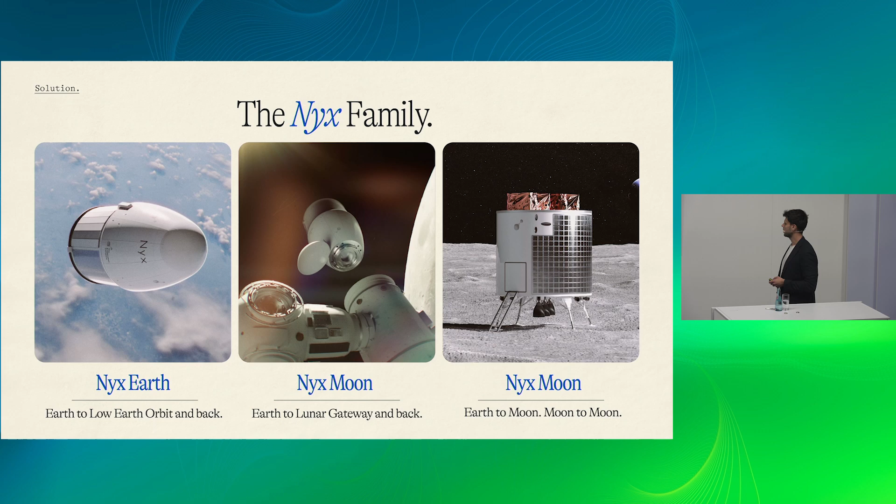Then we're developing a capsule that should go to the moon. In the center picture, either to go to the Lunar Gateway, which is a lunar station that should be around the moon's orbit, done by the European Space Agency, ESA, and on the right side, also a moon lander. Biggest difference between these 2 capsules are these little things here: 3 rocket engines, liquid methane and liquid oxygen. Some parts of this are 3D printed, for example, the combustion chamber, which you will see later.

In space, we mostly want to do integrated cooling systems, so that's actually regenerative cooling. That means that the fuel, which in our case is liquid methane, is not only used to propel the vehicle, but also for cooling. That basically means that you pump your fuel through intricate cooling channels until it reaches the point of combustion, is mixed with your oxidizer, and then ignited to get the combustion going.

That increases performance a lot, and in additive manufacturing we can customize material properties. So for these engines, that mostly means adapting the surface roughness. If you have higher surface roughness, you have higher pressure drop in the cooling channels, which could be bad, but on the other side you also have enhanced thermal performance due to that increased surface roughness.

What's basically happening is these higher surface roughnesses create microturbulence. This microturbulence lowers the pressure, so you have a pressure drop. But on the other side, these turbulences also increase heat transfer. So it's a bit of a trade-off which surface roughness you actually want, not necessarily the best surface roughness is also best for the application.

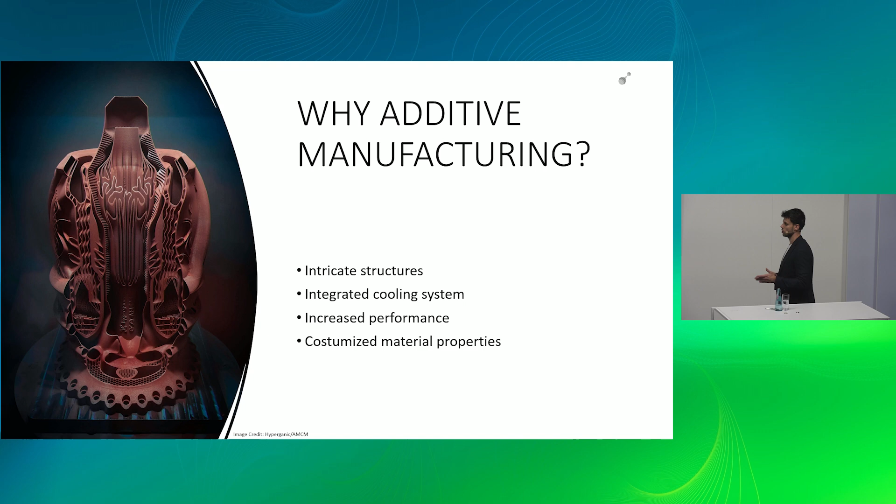When you design a rocket engine, usually you have to do a big trade-off between different materials. Classically, it's either copper-based alloys or nickel-based alloys. Copper-based alloys like copper-chrome-zirconium, or GRCop from NASA, are usually used if you have a very high requirement for thermal conductivity, which is the case for rocket engines. The nickel-based alloys are usually used when you have requirements for very high mechanical strength and chemical resistance. For rocket engines, both is the case.

So usually if you develop these engines, for example the combustion chamber, which is the heart, you have to decide between these two. And that is actually a big trade-off in a thermomechanical way. So you do very big thermomechanical analysis between the materials, and then in the end you would find out which one is best for your engine.

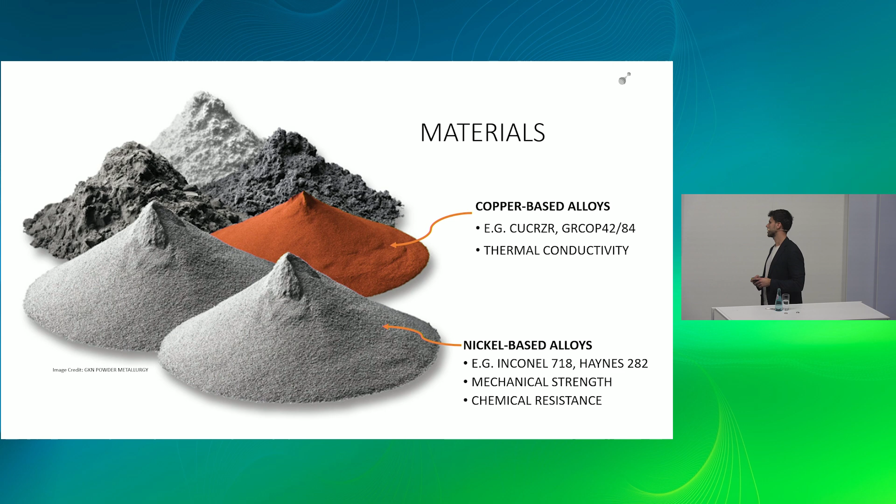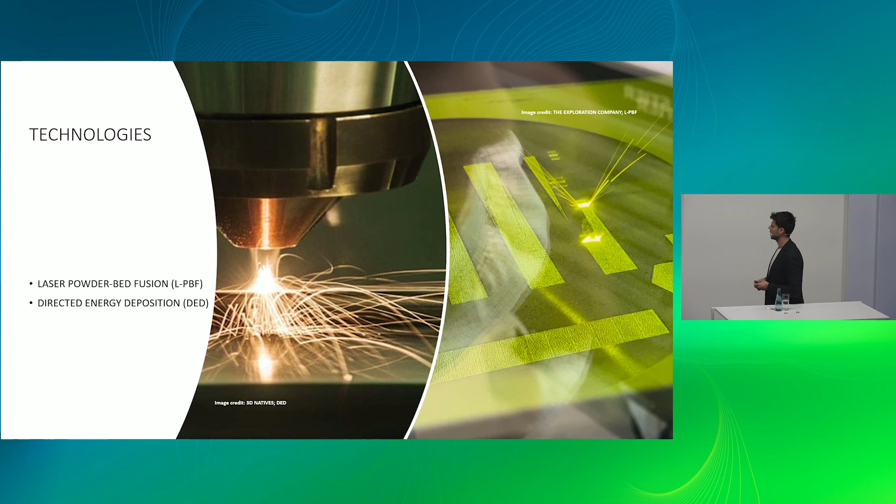The technology we're using at the moment is laser powder bed fusion. This is a picture from the very first build job we did earlier this year in March. Next year we're also looking into directed energy deposition, DED, for a nozzle extension and for tanks. It's a big project for next year.

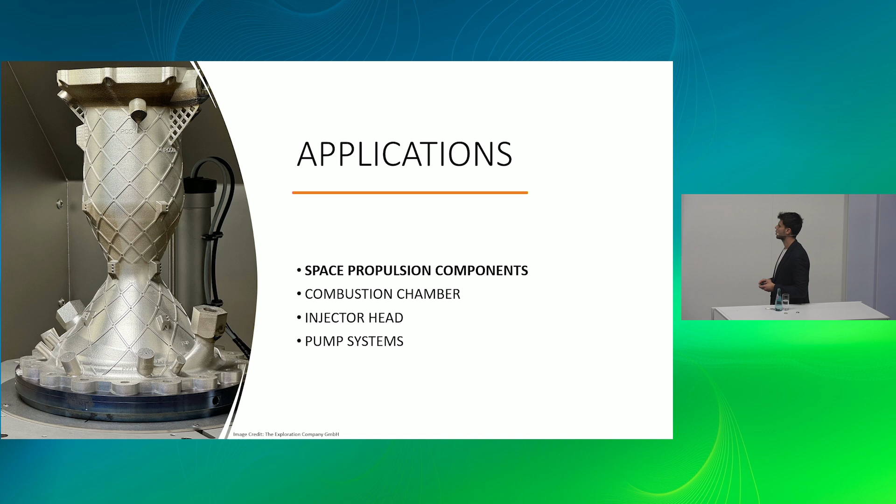To get into the applications, we're mostly or exclusively doing space propulsion components. On the left you can see our combustion chamber for the Moonlander engine. That's the third version we've done so far, and the first one we actually printed in-house, only the second part we've ever done in-house. It's about 400 millimeters high.

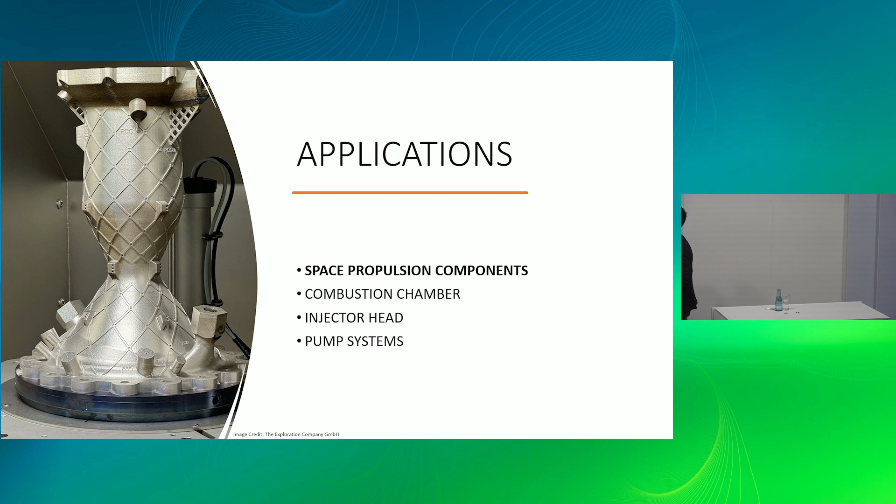Here you can see this regenerative cooling cycle. The fuel goes in, into the manifold, collects and is pumped through very small cooling channels through the part, then injected from the top side and ignited. The wall thickness of this part is only 4 millimeters, and we have to fit roughly 100 cooling channels inside, which is quite a challenge. We're really at the edge of the technology here.

The injector head is another application, placed on top of the combustion chamber in this view. That's where the fuel, liquid methane, and the liquid oxygen oxidizer come together, are injected inside the combustion chamber, and ignited, which then propels the system.

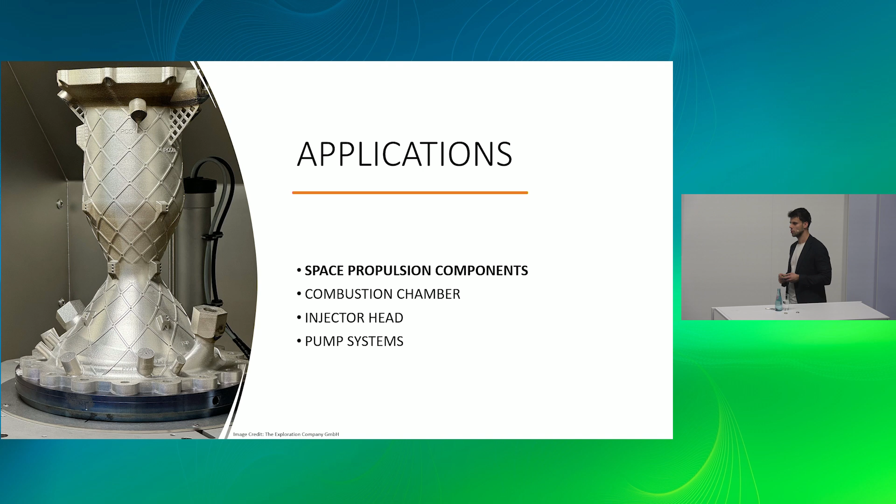We're also looking into pump systems to actually get the fuel and the oxidizer moving. In these pump systems we will develop impellers, inducers, pump housings, and motor casing housings, which is also a topic for next year. We have not started that yet.

Additionally, we have to print this part faceplate up, meaning you have a complete horizontal surface to support. Additional complexity: this support cannot be accessed, since the cavity is completely closed, so we have to have an internal support that cannot be removed. That's the first thing we did—we had a lot of cones supporting that surface.

In a hot firing test, it turned out there's a heat buildup due to that support. It was a massive structure, and heat was concentrating in these cones. The faceplate was getting too hot, with the consequence that it would actually melt if we increased the temperature even more.

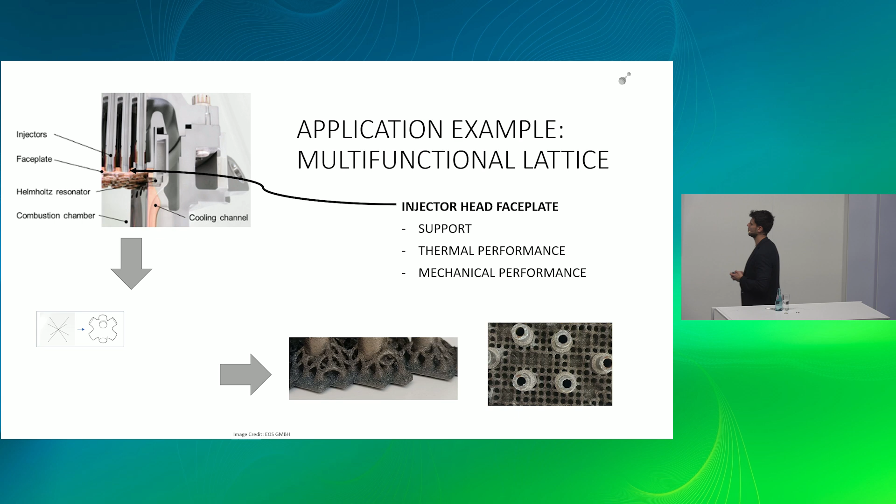For validation, it was actually quick—we just printed some samples for traction and compression. We took the actual lattice geometry, the original beam thickness and distribution, and put it through tensile testing: first traction, then compression, pushing and pulling, and took some values there.

For thermal validation, we took a representative sample of these lattice structures and checked for turbulence and velocities compared to a reference velocity. What we detected, as can be seen in this picture, is that we have a heat buildup in the center of the cones.

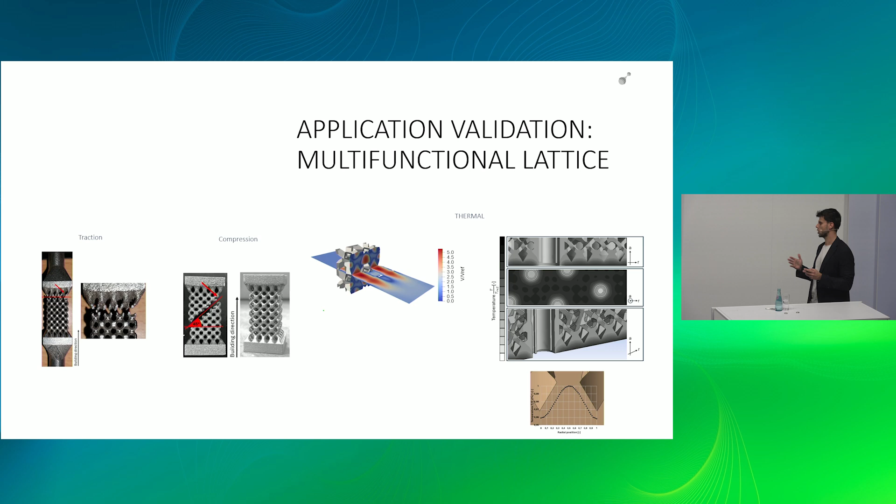So we still need a little bit of cone here for support in a much reduced way. But what can really be seen is that the temperature is concentrating in the center of the cone, which makes sense. You have a massive structure, so in a steady state you have the most heat concentration in the middle, and due to the bad thermal conductivity of nickel-based alloys, there's kind of an inertia for the heat to actually escape, and that is what we try to minimize with this.

So complex products have a lot of challenges, and that's also the case here. One of the biggest challenges is in depowdering. You can imagine if you take out your part and it's completely filled with metal powder, all the intricate structures, all the cooling channels and the cavities are full of powder. So how do you get that powder out? Just using a vacuum does not work because the density of these Inconel powders is too high. You can actually not remove a lot.

What we're doing here is partnering up with Solukon, a depowdering company based in Augsburg. They provide a system where you can clamp your parts, including your build platform, in this machine, and then it would shake and vibrate and turn in a very controlled manner. They have a software called Pathfinder that analyzes all the internal cavities and cooling channels, and creates an algorithm for how to best shake and turn the parts to get the powder flowing out. Additionally, you can apply either inert gas or pressured air to finally get all the powder out.

It's the most critical step in the post-processing, because if one of these cooling channels would be blocked, the fuel would not flow anymore through it. So the cooling functionality is lost completely. You have a heat buildup, which would, in a hot firing, lead to a melting of the engine, if not explosion. So that is very, very critical.

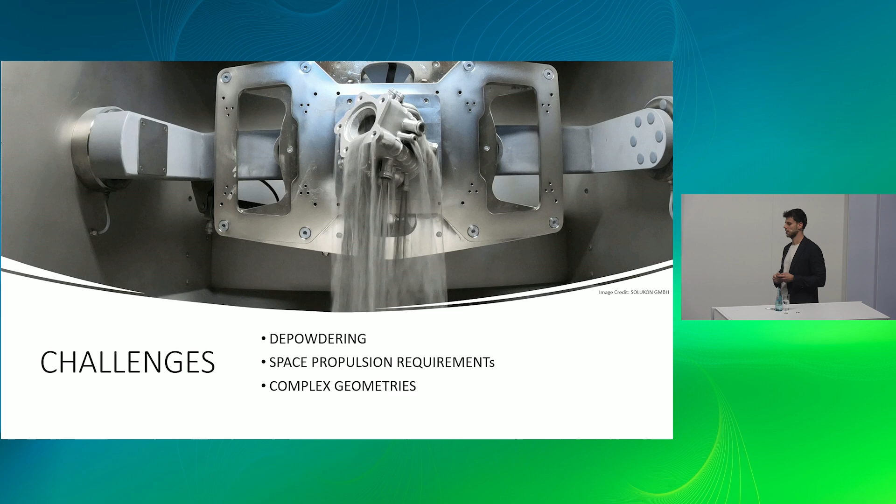About testing, the most crucial test is in the end the hot firing. That happens after all manufacturing tests, and that usually qualifies the engine. What you can see on the picture is the first generation of engine that we printed in 2022, I think. We did that with a partner, but the material is the same, Inconel 718.

So what happens here is you put your parts - that's a combustion chamber, and on the left, the injection head, you cannot really see it, it's frozen from the liquid oxygen. You put the parts on the test bench, and then you fire the parts with a lot of thermocouples and pressure ports. You check what is the temperature and pressure situation along the part.

You then compare if that is the same as you simulated in your simulations before. If there's a difference, this delta will go into the next generation of engines, into the next iteration. And that's basically also the concept of how you develop rocket engines. You design, you simulate, you build, you put it on the test bench, and by these values and measurements you try to make the next generation of the engine better, and then put it on a test bench again. So that test bench is the qualifying part in the end.

Obviously, we also need to do a lot of material testing. That's a microstructure surface check, to make sure that the material is complying with the standards and is also able to withstand the thermal and mechanical loads that we have.

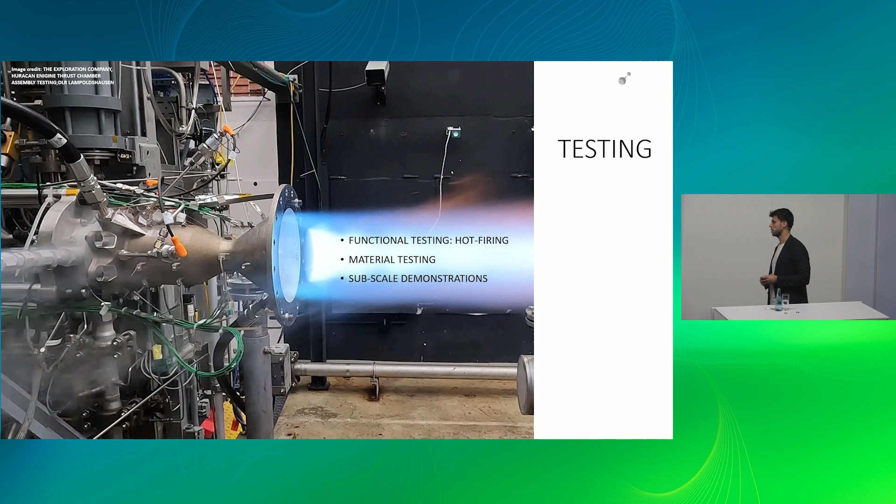It's a topic of an ongoing project to find out. For design opportunities in additive manufacturing, we have a cooperation with Leap 71 - there's a lot of parts at this trade show from them, they're very active at the moment. What we do with them is look into new design possibilities, like algorithmic engineering, generative design, to possibly create an engine configurator where you just change a few input parameters like thrust or size, and then have a design that fully designs the part as you want. It's in a very early stage, and at the moment we're doing it with classical CAD, but it's something we are exploring.

As a technology outlook, we're active in research. We just started a research project with the technical university Munich for laser beam shaping. That means you take your laser beam, instead of keeping it as a Gaussian bump, a spot that cannot do anything but move, you shape changing spots for the energy density. What you can see on the top right corner is a donut or ring shape, meaning you no longer have the highest energy density in the center of the spot. That opens completely new worlds for optimization, speed, quality, and a lot of other things.

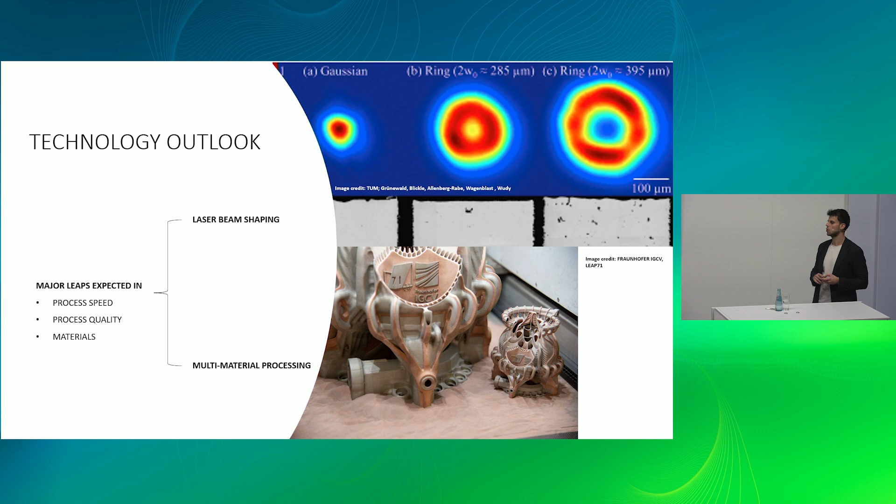Then on the bottom, we're also looking into multi-material processing. We got appointed by CNES, the French space agency, to work out a concept for a heavy launcher engine. The project is called Typhoon, and in the first phase we're doing concept design and considerations of how such an engine could look. One big question is which materials you choose and how you process them. For bigger engines, sometimes you cannot have just one material, just nickel-based or just copper-based, but need two materials combined. Traditionally you can do that with copper raw parts that are turned and then galvanized with a nickel-based alloy structure on the end. On the other side, there's development work ongoing to do that in one process, combining two additive manufacturing processes.

So that's it. Thanks a lot for your attention. If you have any questions, I'm here today. That was my last project at AMCM, so if anybody's wondering if the part is real - because I've been asked that - it is real. So see you later. Looking forward to your questions. Thanks.

Thank you, Max. We have time for maybe one quick question from the audience if anybody wants to ask one in public, or you can of course call Max and ask him in private. I just had a quick one.

In terms of materials, how well do the materials available to you in AM suit what you want to do at the moment, and how much do you think materials are holding you back? Yeah, limited. We're starting with a nickel-based alloy Inconel 718 because it's one of the most mature materials out there, and by chance it was suitable for our process. If we had more strict requirements in terms of thermal and mechanical load, possibly it would not be enough anymore. Companies like SpaceX, for example, actively develop alloys themselves because they have even higher requirements and want to make the parts even better. So for these first steps, we went for materials widely available, firstly in the supply chain, then in maturity in the industry, also availability of process parameters by the OEMs. That's what we're starting with. For the one engine, we're quite lucky because it fits very well. For others it might be different, and we might come to the point where it's not sufficient anymore, and we need to look into new material developments. So, limited availability.